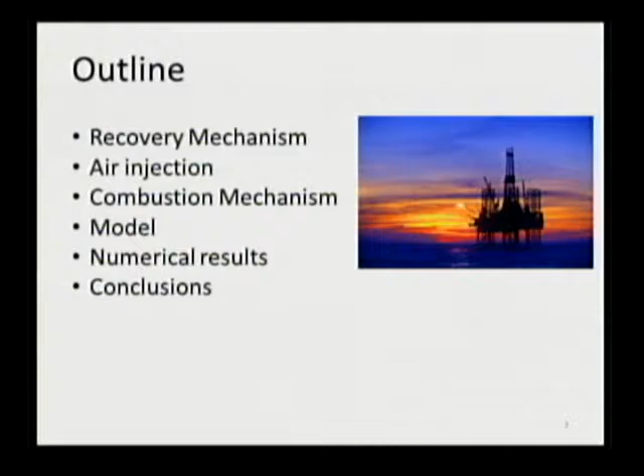First, I will give a brief introduction about different mechanisms in the petroleum industry. Then I will go specifically into air injection and explain the combustion mechanism. Then I will talk about our model, and at the end some numerical results covering different effects such as diffusion processes, effect of composition, initial water present, and finally some validation with experiment and conclusion.

As many of you know, there are three different recovery mechanisms in the oil industry. The first is primary recovery, a natural flow due to pressure difference between the reservoir and the production well. It can also include artificial lifts like pumps and gas lifts. Primary recovery can give production recovery up to 30% of an oil reservoir.

Then we have secondary recovery, which is more water flooding, and sometimes water alternating gas flooding. The water is injected through the injection well to push the oil through the production well, and it's also sometimes used for pressure maintenance of the oil reservoir.

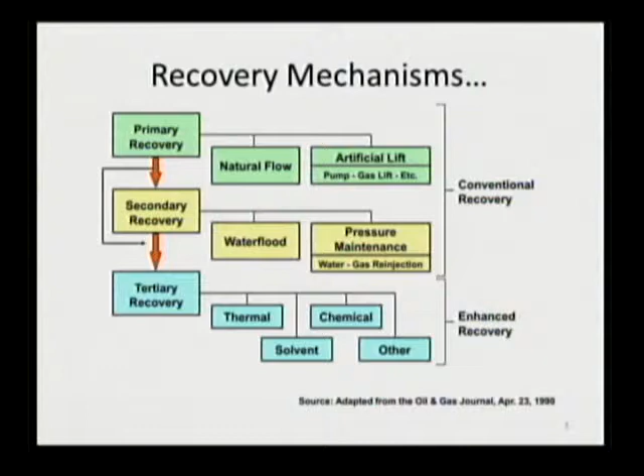Then we have tertiary recovery, which can give up to 15% of the oil recovery in a reservoir, composed of thermal, chemical, solvent, and other enhanced oil recovery methods. Our interest is in thermal, specifically air injection.

Why are we using combustion? This is the viscosity of the oil, and this is the depth or pressure of the reservoir. If we go to higher pressures and higher viscosity oil, like oil sands or other heavy oil, in-situ combustion will be an alternative. But in-situ combustion traditionally refers to air injection into heavy oil.

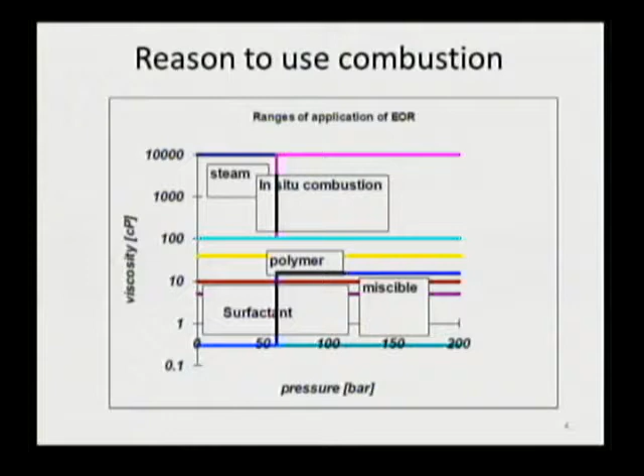What I'm going to focus on in my presentation is air injection into light oil, because of the availability of air everywhere rather than other gases like nitrogen and CO2, which minimizes separation cost.

The advantage of air injection is that it's applicable to highly heterogeneous, low permeable reservoirs due to heat production from oxidation. I will come to that later. The fluid in low permeable parts can be easily evaporated and then collected in high permeable parts and produced through the production well.

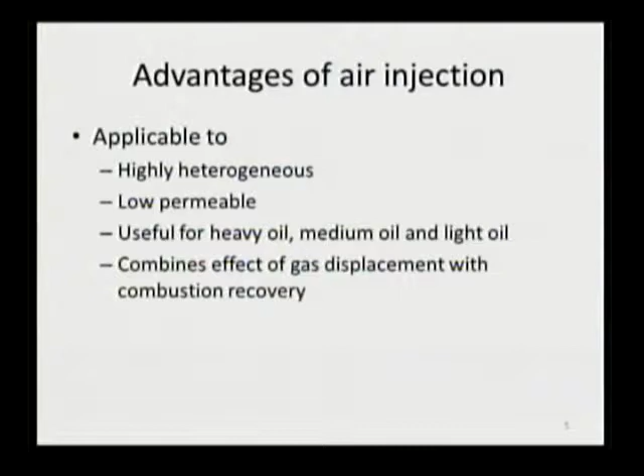It's also useful for different kinds of oil—heavy, medium, and light oil. The key point is that it combines the effects of gas displacement with combustion recovery.

This is a traditional picture of heavy oil in-situ combustion. This is the reservoir, this is the injection well. Air is injected through this well, and we have a horizontal production well here. When the air is injected and comes in contact with oil, it can start to ignite, or we can initiate ignition.

Then we have the combustion wave, or combustion front. What's left behind, if it's heavy oil, is some residue like coke. If it's light oil, it should be a clean, swept zone. In front of that could be a steam region or flue gases coming out from combustion. Then we have an oil bank, which is hot, followed by cold heavy oil that can drain to the horizontal production well and be produced.

It's believed there are a couple of different reactions in air injection phenomena. I'll start with low temperature oxidation, which can occur between 150 to 350 degrees Celsius depending on the nature of the oil. The fuel is liquid oil, and hydrocarbon reacts with oxygen, leading to oxygenated hydrocarbons such as alcohols, aldehydes, and other compounds.

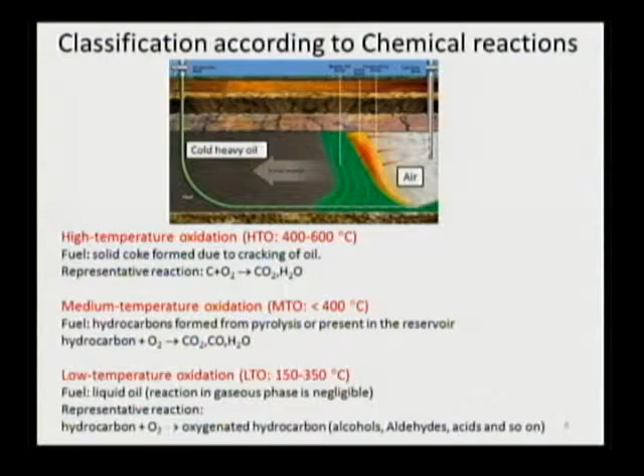If I want to show the difference between these mechanisms for light oil and heavy oil: in the light oil, low temperature oxidation (LTO) is normally full hydrogen-carbon bond breaking, while in heavy oil it's more oxygenated, producing oxygenated compounds which are not favorable because they have high viscosity and are difficult to flow.

MTO, which is typical for light oil, is small hydrocarbon oxidation. HTO can be negligible for light oil, but it can occur, though without a certain effect. For heavy oil, it's coke burning, generating carbon oxides and water.

Then we have cracking and pyrolysis. In light oil, it can form smaller hydrocarbons, and in heavy oil, it's more coke, which is a fuel for high temperature oxidation reactions.

Distillation plays an important role in light oil reservoirs but can be negligible in heavy oil. The focus of my work is to see the relative importance of evaporation and oxidation in light oil reservoirs.

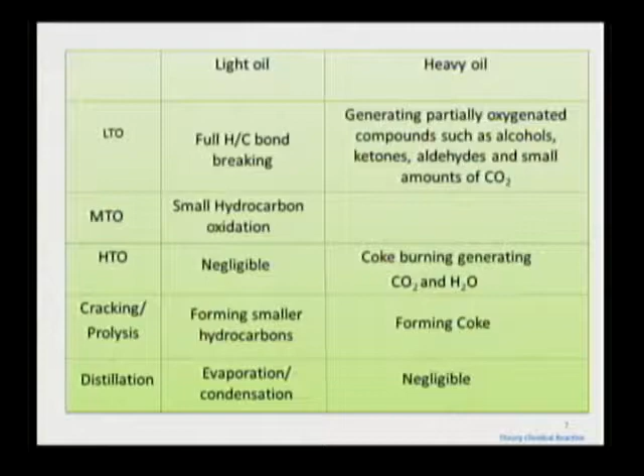We started to think about air injection at medium pressure, because what's normally found in the literature is high pressure air injection, starting at really higher pressures and higher injection velocity. We said it could be applicable for efficient light oil recovery.

The interaction between combustion and vaporization is the primary mechanism in MTO, whereas in HTO combustion it's not — in the HTO process, combustion is more important.

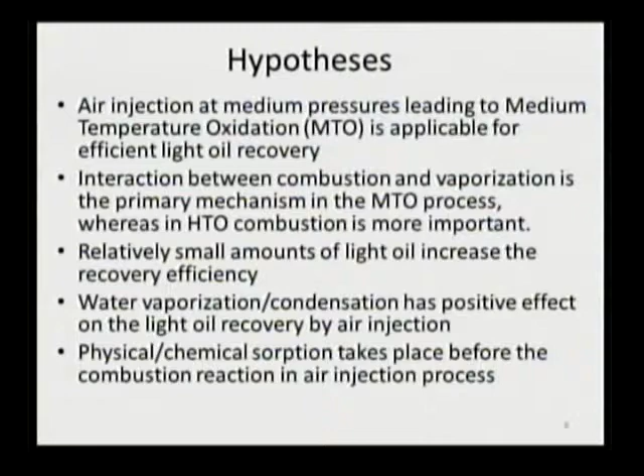We also showed that relatively small amounts of light oil increase the recovery efficiency, and water vaporization and condensation has a positive effect on light oil recovery in air injection. We also believe that physical chemical sorption can take place before any MTO mechanism in a light oil reservoir.

We had a model composed of conservation laws. For our components, we had 3 components in the gas phase: oxygen, hydrocarbon gases (vaporized hydrocarbon in gas phase), and remaining, which consists of other carbon oxides and nitrogen, and also water in gas phase.

In one case we have a one-component oil, light oil. In the other, we had a 2-component oil, with light and medium components. Then we have our energy balance, thermodynamic relationship for liquid hydrocarbon and vaporized hydrocarbon, and constitutive relations. We use Darcy's law here.

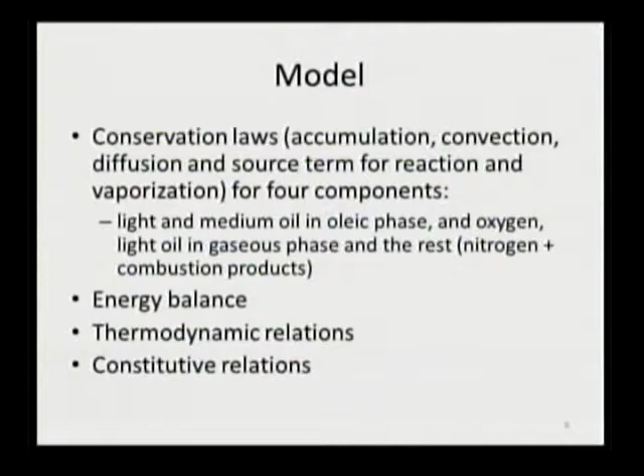We assume a 1D domain. Air is injected from the left, and we produce everything from the right-hand side. We had 2 reactions, one for light oil and one for medium oil. In the 2-component system, light oil can both vaporize and combust, while the medium hydrocarbon can only combust.

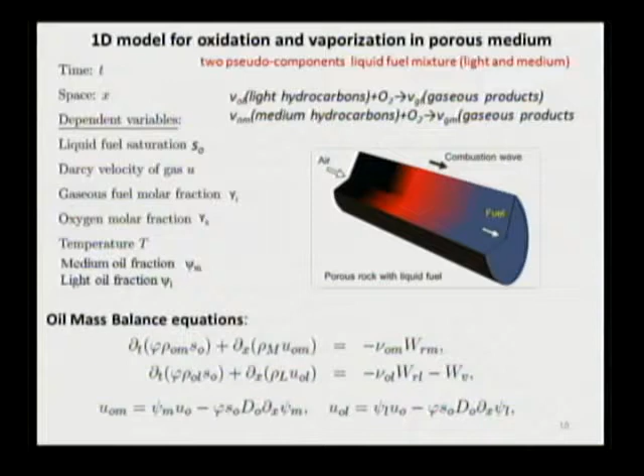This is the oil mass balance for the 2-component system, medium component and oil component: accumulation, convection, and then we have a reaction source term for medium and reaction for the light hydrocarbon, and we have vaporization only for the light hydrocarbon.

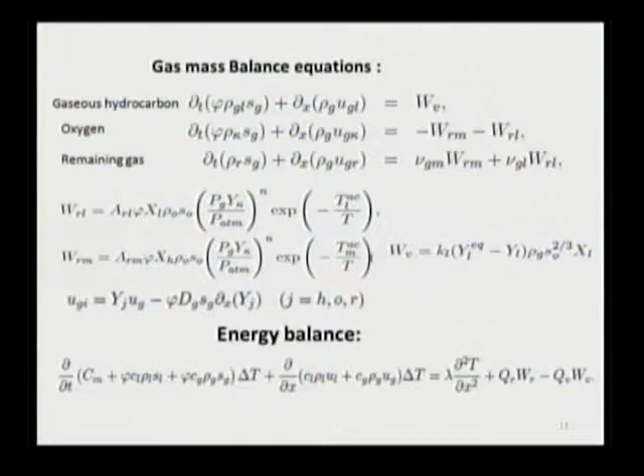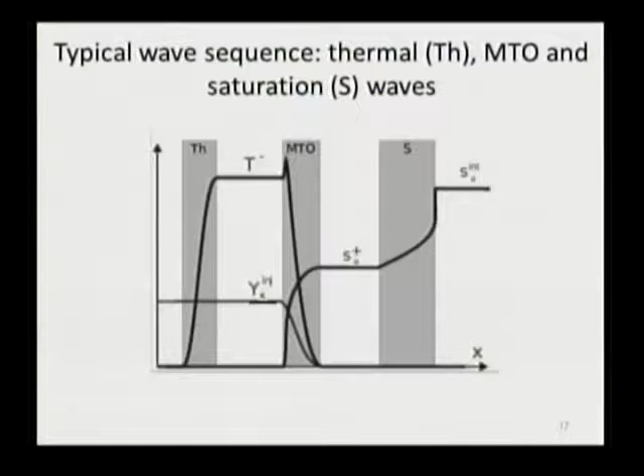This MTO wave, as you can see, shows the reduction in oxygen fraction can be an indication of any combustion happening here, as well as the MTO wave. Downstream of the MTO wave, we have the typical Buckley-Leverett rarefaction, shock, and initial value of the saturation wave.

If we look more closely at the MTO wave, we can see 2 regions: the vaporization region and the reaction region. In the analytical solution, it was assumed that the vaporization region is really fast.

That's why you see a really thin vaporization region compared to the reaction region. In the vaporization region, we assume the temperature is constant, and there are small amounts of oxygen because there's no oil left behind, and there's no oxygen consumption — we have almost constant oxygen.

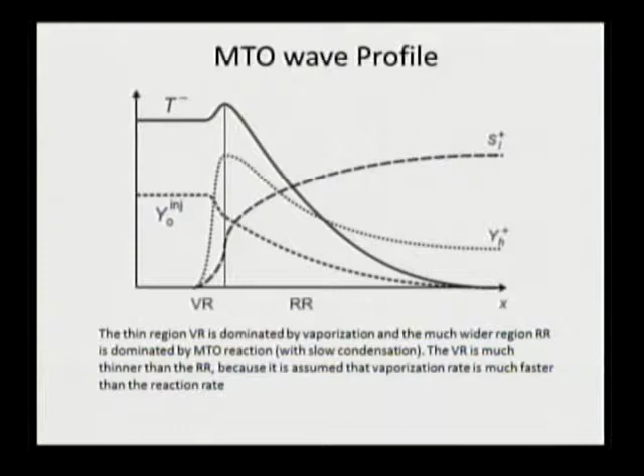Then it starts to be consumed, while we also have YH, the gaseous hydrocarbon, starting to vaporize and then condense due to the temperature changes downstream of the combustion wave.

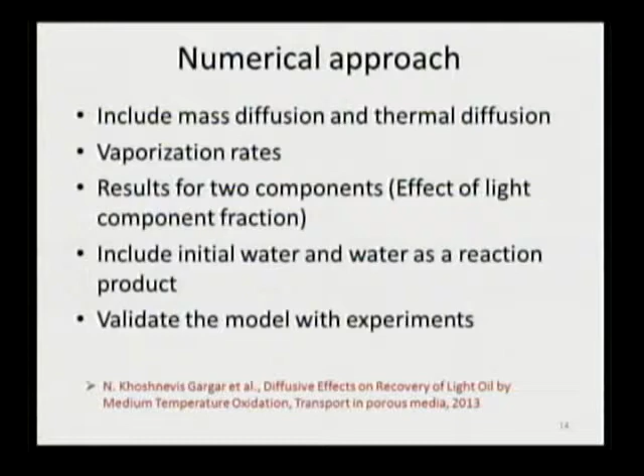Then we did some numerical work and included diffusive processes like mass diffusion, capillary, and thermal diffusion. We added another component to the system to see the effect of light component fraction, and included the initial water and water as a reaction product.

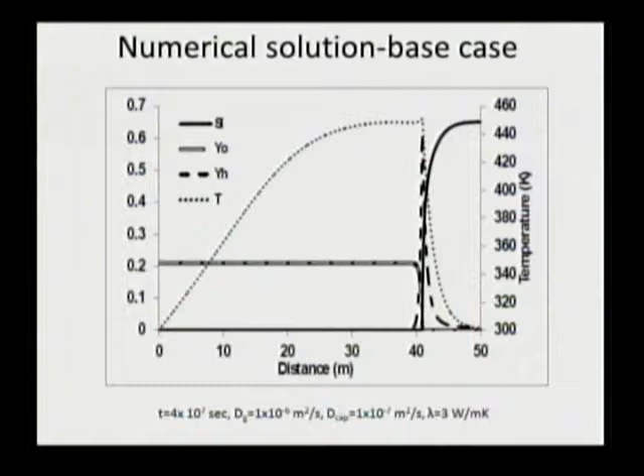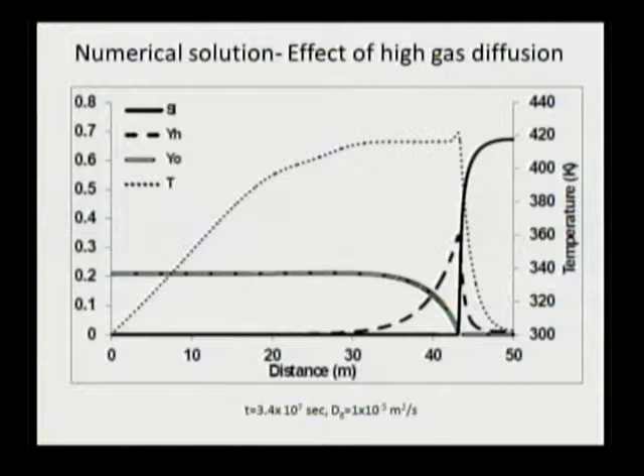Then we did it with high gas diffusion.

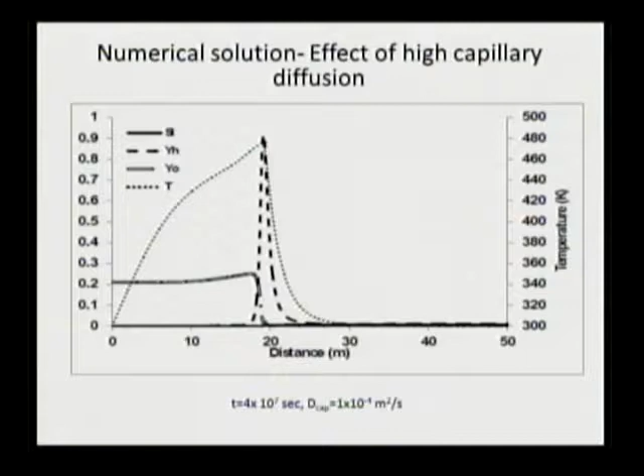Well, I would say that the whole process was a bit smaller, but still the structure of the wave were preserved. And then we did it with high capillary diffusion. Actually not realistically high, it's really high because we want to see the difference. But as you can see, that's a completely different process, and no oil is already here. Most of the oil is swept away by gas injection phenomena, and the small amount of oil left behind starts to react with the oxygen, and the MTO wave velocity is really slow.

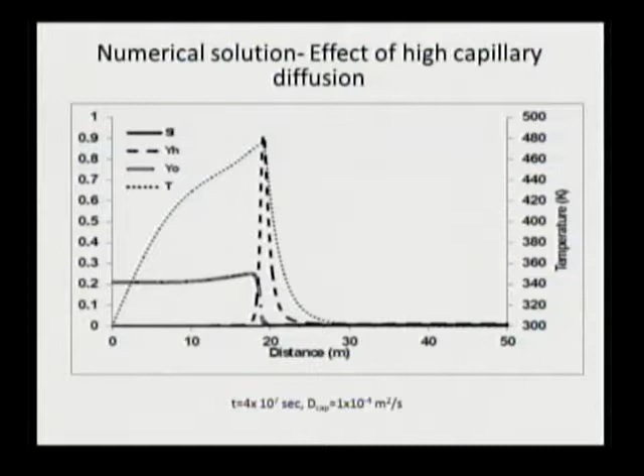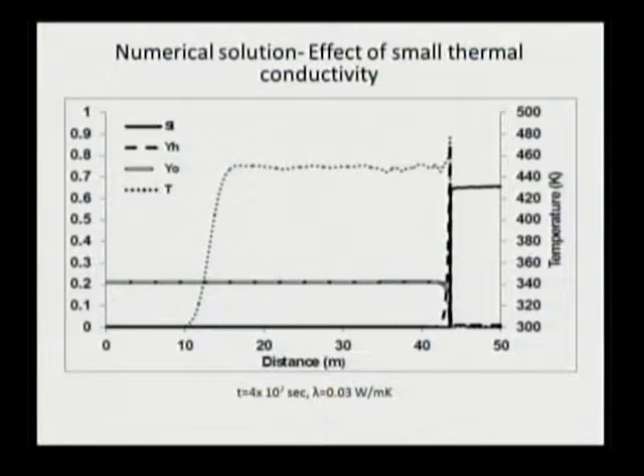That's why it leads to higher temperature upstream of the MTO wave. Then we decrease the thermal conduction. As you can see, we almost get the qualitatively same behavior as the analytical method, because in analytical the thermal conduction was zero.

And then we did it with extremely high thermal conduction for rock. And then we see completely all the profiles are more wide, and it's happening in a bigger area, like temperature increase, or even this condensation of the gaseous hydrocarbon.

Then what we did, we add another component as medium oil, and we only let the medium component combust but not vaporize. This is a numerical simulation result of 20% medium component and 80% light component. As you can see again, the structure is the same. We have a heat wave, we have a combustion wave, and this is the saturation of the oil.

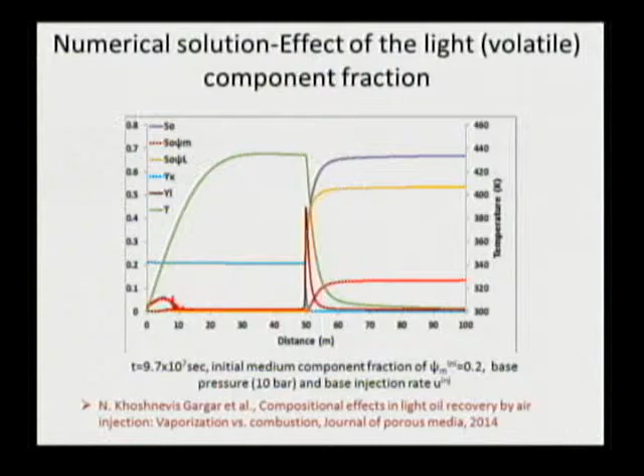This saturation is because of the MTO wave. Then we have light component and heavier component. But still, small amounts of heavy oil is left behind. It's because of the initialization effect, because at the initial times, the MTO wave is not still, let's say, efficient enough to move the whole oil downstream.

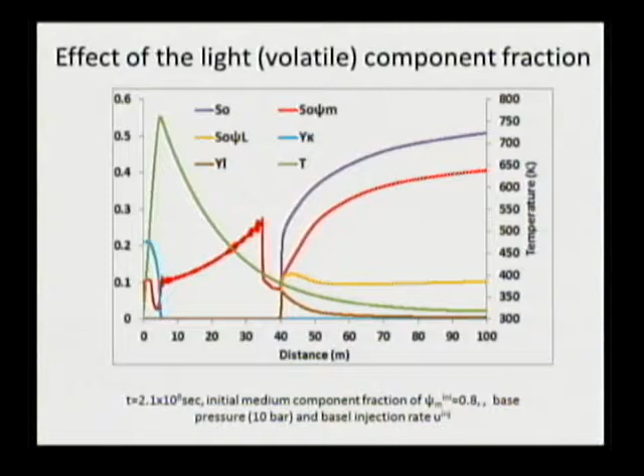And then we did some other simulations. We add water. Well, water was actually in. We consider the condensation of produced water as a reaction product. Here is our numerical result for one component with no water condensation.

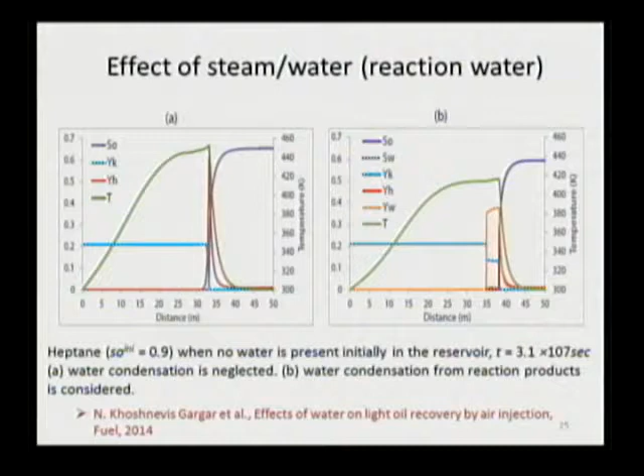Here with water condensation, you see this orange curve, which is the steam fraction in the gas phase. The condensation of it leads to these dots, small amounts of water saturation, and this whole process, like adding water condensation, speeds up the recovery. Even though it's so small, we did a mass balance, and this water condensation is only responsible for 10%. If you have water initially in the reservoir, this water is only 10% of the whole water, but still it can enhance your oil recovery, and it can speed up your recovery.

Then we add an initial value with heptane. Heptane has a boiling temperature almost around water, close to water, a bit higher, but close to water. And then we see completely different behavior. We still have a temperature thermal wave, combustion MTO wave, and we have a saturation wave, which is moved to the right. It's not possible to see it here because it's only possible to see it at initial times.

And then we have vaporization of water, and then we have a buildup of steam, and then we have a buildup water bank, and then it goes to its initial value, while we also have the first oil bank, which is due to the MTO wave, and the second oil bank could be because of the water bank just behind the oil bank. And again, if we compare this one with our base case, we see that water has a positive effect on the oil recovery.

Then we did it with dodecane, which is a heavier component, and it has a really higher boiling temperature than water. We see completely different behavior. In this case, the condensation of water and oil is happening together, while vaporization of the water is always upstream of the combustion wave, while here water and oil is completely separate from each other.

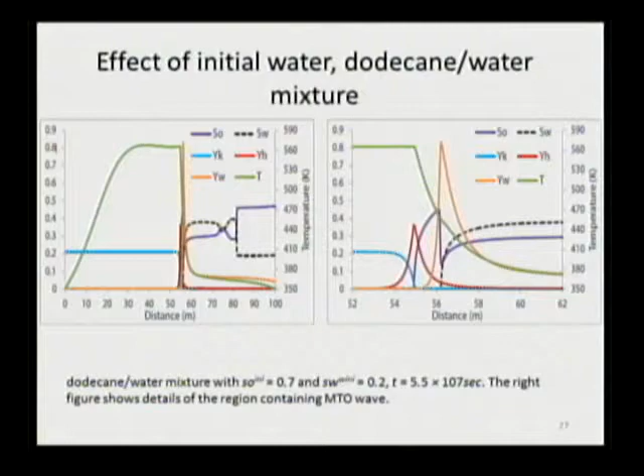This purple one is oil saturation, the saturation wave, and then we have a water saturation, and it goes to its initial value. Then we add a high water saturation, 60%, the other one has 20%.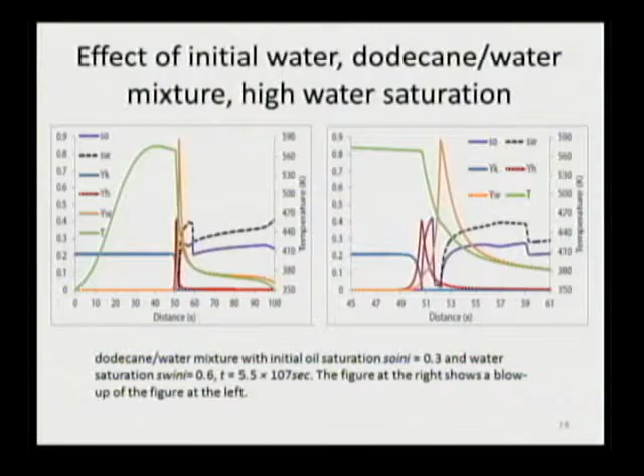We see the same behavior, completely different vaporization and condensation of water and oil, and the whole process is really slower than the other one because water is more volatile in this system. If you put more water in, then the wave needs to be there to be able to vaporize all the water, and the whole process is slower.

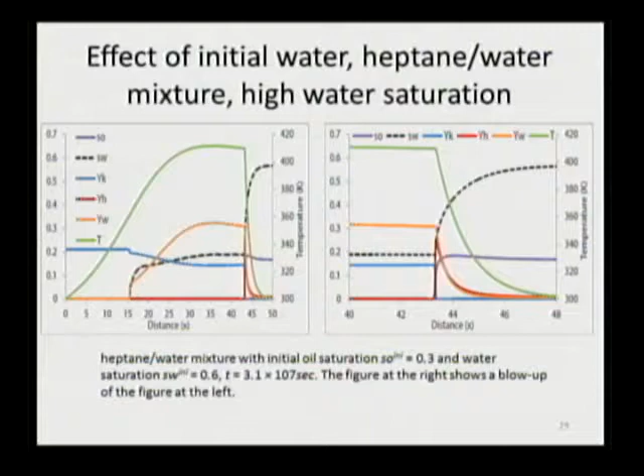Then we did the same 60% of water in heptane water, and we saw that it still has a positive effect, and it can fasten the whole recovery mechanism. We are still seeing the same behavior of water vaporization happening upstream of the MTO wave, and then condensation of both at the same time, which causes the recovery to be more efficient.

Then we draw the produced oil over the initial oil with time. The left one is for heptane. This is when we don't consider the condensation of water. You can see that it can give almost 20% underestimation of oil recovery. It can show the importance of water in the reservoir, or water condensation.

This is with initial water of 0. The green is with 20%, and the purple is 60%. As you see, when the oil boiling temperature is around water or close to water, the increase of initial water saturation can lead to higher production. You see 3 different stages.

The first stage is due to the complete gas injection effect. When you pressurize the whole system, you put gas, immediately you have a rapid production. Then you have 2 other systems. MTO is more responsible for these 2 reactions. I will come to it later. And then this is for

Dodecane. This is for 0 water saturation, and this is for 20%. If I put 60% of water saturation in dodecane, which has a really higher boiling point rather than water, then you see that higher water saturation has a negative impact on the oil recovery.

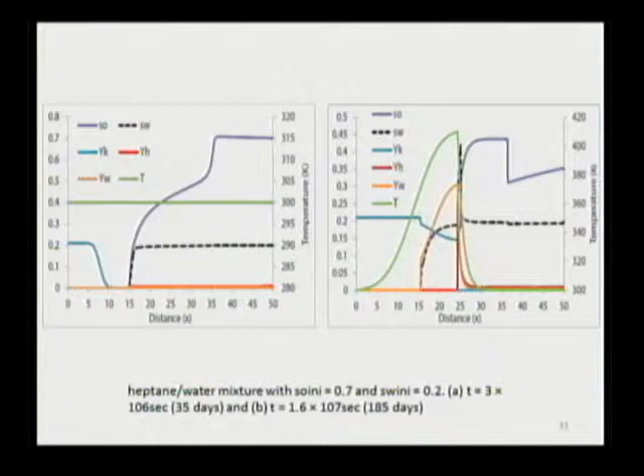If I look at the heptane water mixture profile, it's in the initial times. This profile, which is the saturation wave, which was not possible to see in other figures, is happening in initial times, and is responsible for this part.

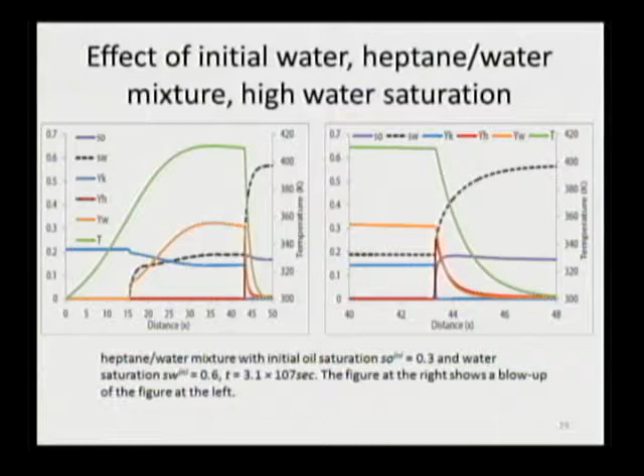And this wave, which is happening here, is in intermediate times. Oh, it's this one. And if I want to go back, this wave, which is happening at the later stage or almost end stage, is this stage, which gives us this recovery profile.

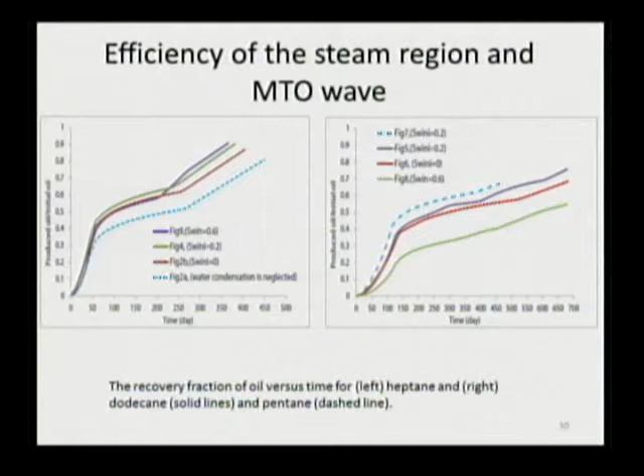Then we tried to validate the whole process with experiment, which was the most challenging and difficult part of my PhD. We had a reactor. We put a core in and tried to saturate it completely with one component, oil, which was hexadecane.

It started to inject, under pressure. The pressure we used was 10, 30, 50, and 70 bar. We start to inject oxygen, or air, at a constant temperature from bottom and produce everything from down. We had a separator which can separate the oil and gas, and the gas portion went to the gas chromatograph, where the component in the gas was able to be analyzed.

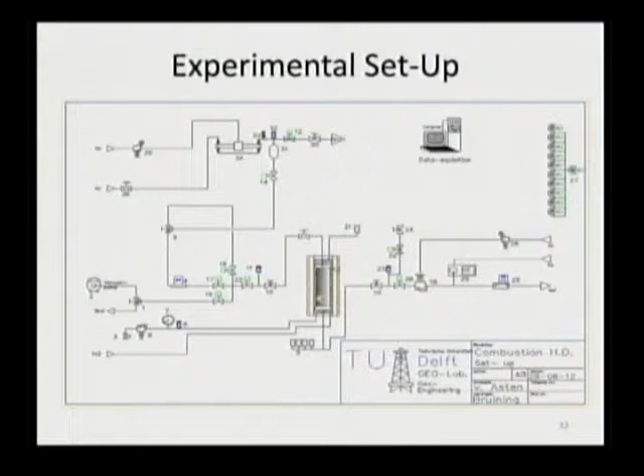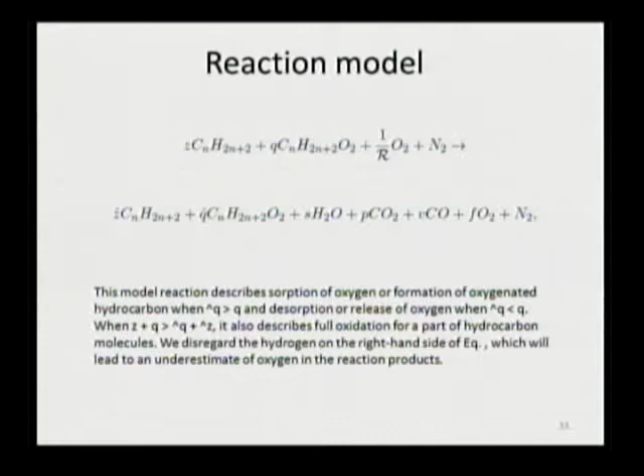The reaction model proposed was this: hexadecane, which can react with oxygen and give us some oxygen addition products. This oxygen addition product can then be converted to hexadecane itself, or further undergo more oxidation. If this Q hat in this reaction model is bigger than Q, it gives the absorption of oxygen and formation of oxygenated hydrocarbon. But if Q hat is smaller than Q, it gives a desorption or release of oxygen by physical or chemical phenomena.

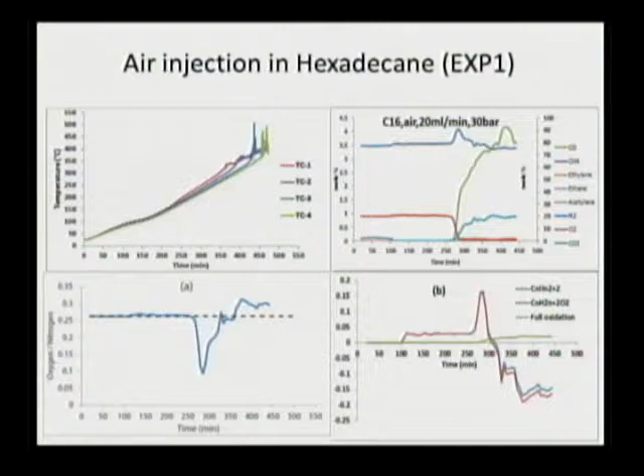Then after a while, it starts to release the oxygen, but then it goes to a plateau, then starts to release more oxygen, which shows us there could be some physically dissolved oxygen in the oil, released later. With that reaction model, I showed you that hexadecane here is converting to these oxygen addition compounds, and later they are either consumed by reaction, or again releasing oxygen and converting back to hexadecane.

This was the same experiment, but with higher injection rate. You see still small peaks here, which are indication of a reaction. But when we inject with higher injection rate, we give less residence time for oxygen to be in contact with the oil, and we have a bit of oxygen breakthrough here, while we were expecting it to be zero.

But finally, because we were heating up the whole system, the temperature was high enough to capture the oxygen there, and then we have oxygen at 0 here, and at the same time releasing of CO2 and CO, with the same behavior here.

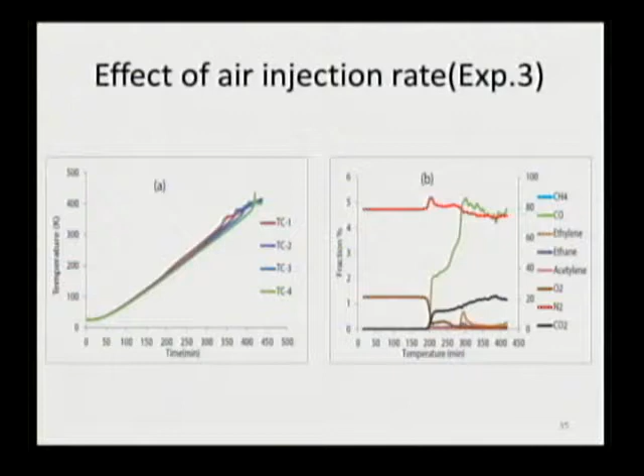If we look at our different experiments, we almost see the same behavior of oxygen release from the oxygenated hydrocarbon in different stages, for different pressures: 10, 30, 45, and 70 bar.

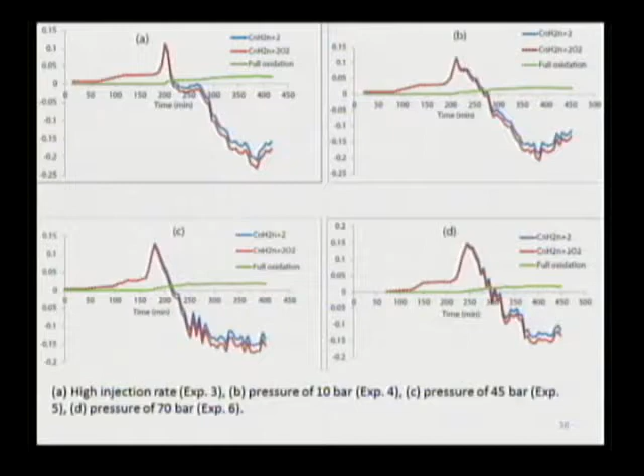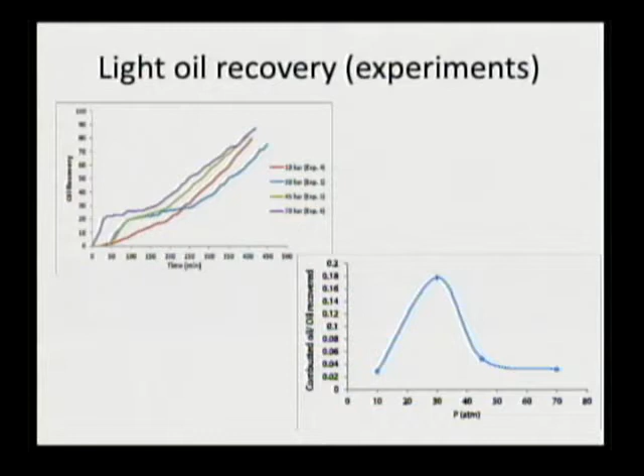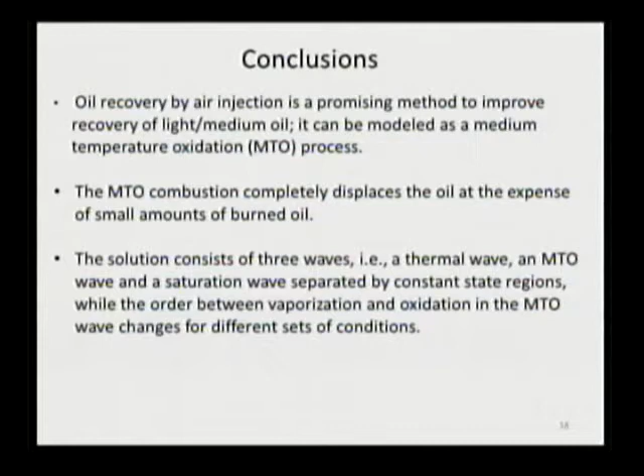The order between vaporization and oxidation in the MTO wave changes with different sets of conditions. For a predominantly light mixture, vaporization occurs upstream of the combustion, and the combustion front velocity is high as less oil remains behind in the combustion region.

But for oil with more non-volatile components, the vaporization moves downstream of the combustion zone, and more oil is left behind. Therefore, the combustion velocity is slower. We get to really high temperatures, almost around the high temperature oxidation zone.

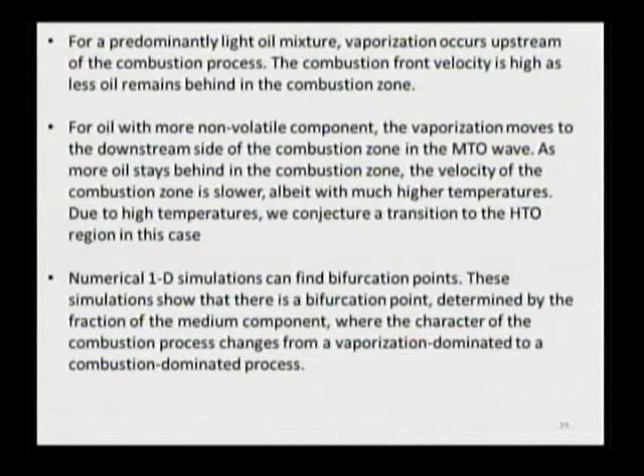This can show us a bifurcation point in the composition of the oil, which can change the character of the combustion process from a vaporization dominated to a combustion dominated process.

The model and also experiments give almost between 82 to 98% of oil recovery, opposed to 60 to 70% of water displacement.

We also showed that the burning over the produced oil can change from 2% at 10 bar to 18% at 30 bar, and then decrease to 5% at higher pressures.

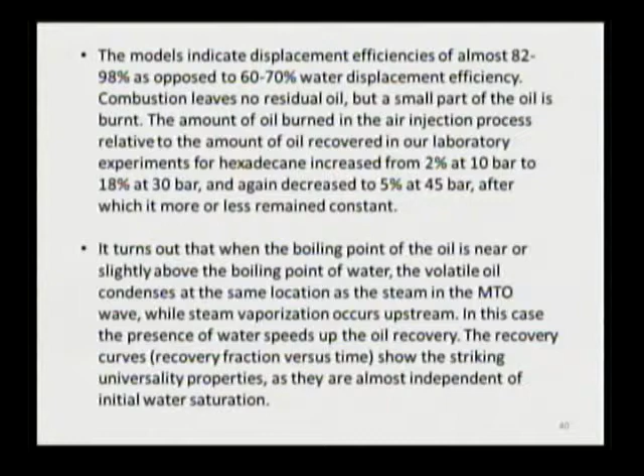But if you have a boiling temperature really higher than that temperature, then water won't have a positive effect on your system, and it will slow your whole recovery mechanism.

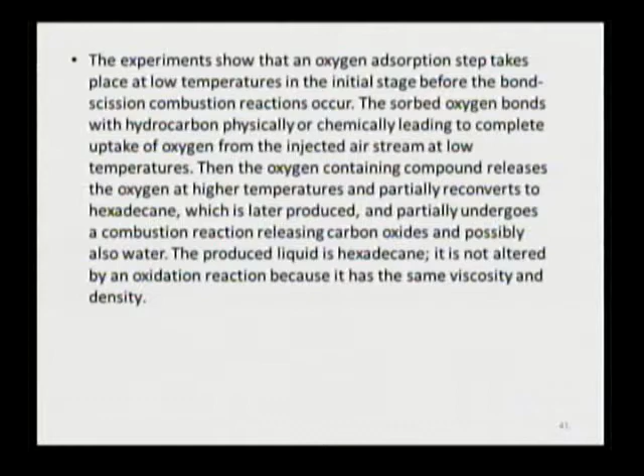This was more our idea: we showed that this oxygen adsorption step takes place at low temperature initially before the combustion. These oxygen compounds then release the oxygen at higher temperature, either to be converted to hexadecane, or they also undergo the combustion reaction furthermore. I think I will skip the rest.